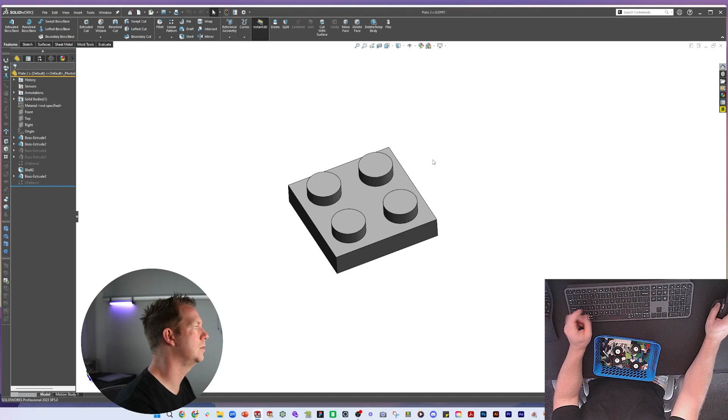In our first lesson on this subject, we built this little plate, 2x2, with configurations going up to 2x8, 2x8 being the largest one needed for this assembly. There's a bit more work to do on this part, which we'll add in later.

We'll come back to some detailing at different points throughout the process. How we're going to run from here is we're going to build the parts in order that they come up in the assembly instructions. So our 2x2 brick is number 1, but we now have a 2x1 and another piece here, which we will find out in a second what they are.

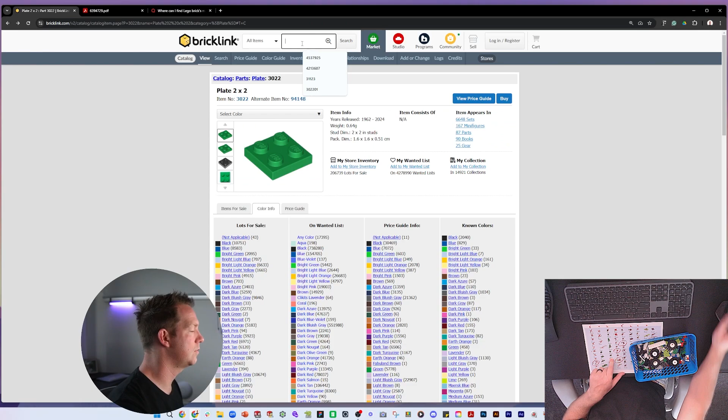So that green brick is going to be called - we can search for it here. Go to 3023, it is a plate 1x2. Now, I think the smartest thing to do will be to use our plate 2x2 and add one of these configurations, which will be 2x1. We're going to add this one in manually because it's going to act a bit different to the rest of them, since in the 2x1 we're going to come up here before the shell.

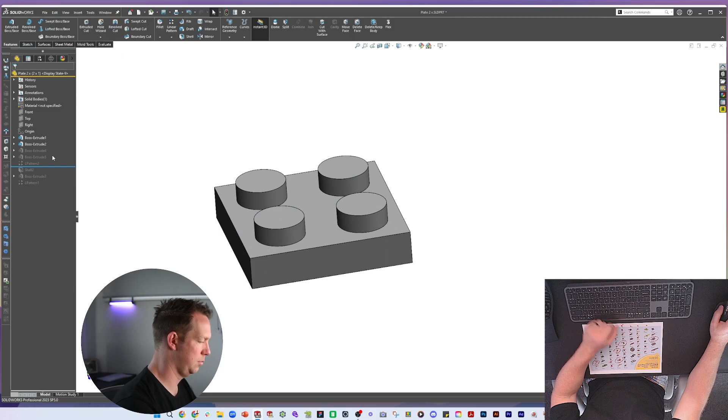Now let's just have a look at the part itself. You can see it doesn't have a big circle in the middle, just got the little circle. So the detail's a little bit different. The top's the same, and we'll put some measurements in to see exactly how big that is. So we will change that detail.

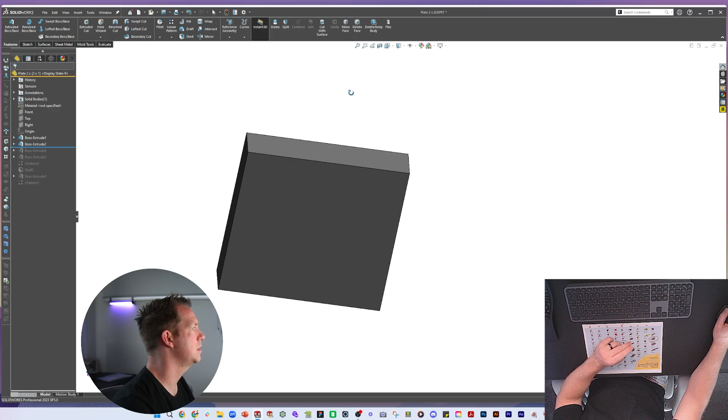And we're going to do it here. The way we'll do it is to come up to this point and we'll use our right plane, and let's see if we can't cut a side off and see if those parts will be central. Now, I get the feeling they won't be.

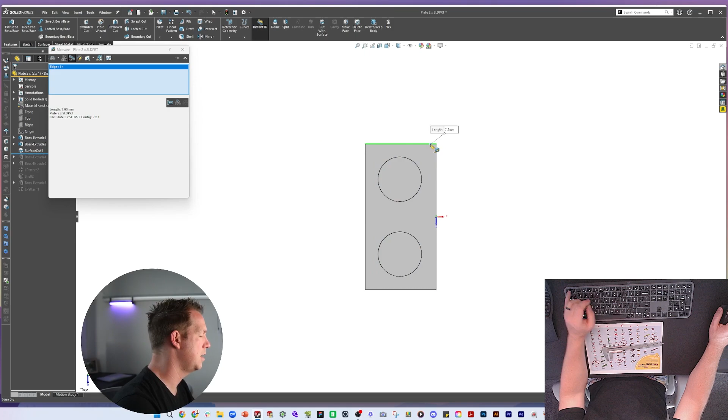First, let's measure. Now, we have here should be 15.8, which it is. And then the skinny side looks like 7.8. If we click on that edge, 7.9. Now, what I'm interested in seeing is how close those are to the center point here, and I can see that it is 0.11 of a millimeter off being the center.

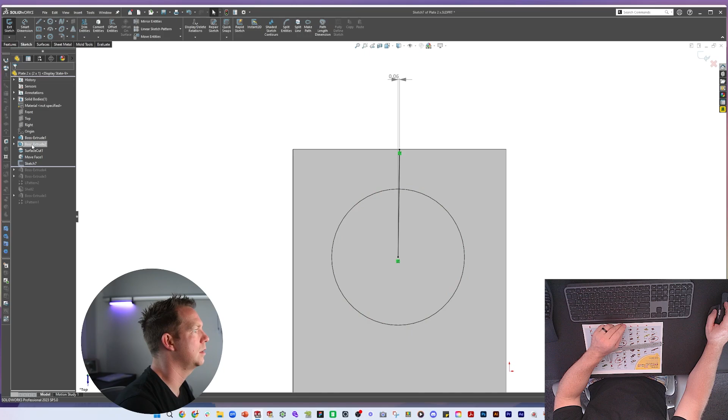So what I'm going to suggest we do is an offset face, 0.11. We're going to move this face inwards. Now we should find that this line is vertical. Let's see what's going on there - 0.06, okay sorry, to 0.2 we have to move it. 0.22. And now that line is 0, 0.

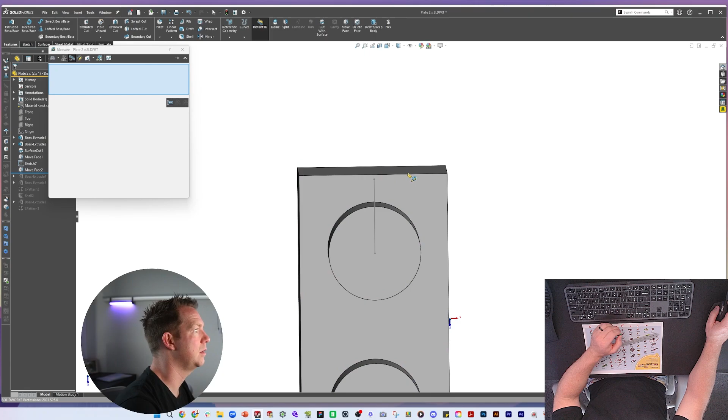And now our measurement is 7.7, 7.68. In fact, I think it's a tiny bit small. So what we're going to do now is just move both sides out 0.06. Okay, so now it is in the middle, and we have a 7.8 millimeter dimension, and it is only for this configuration. So that's cool.

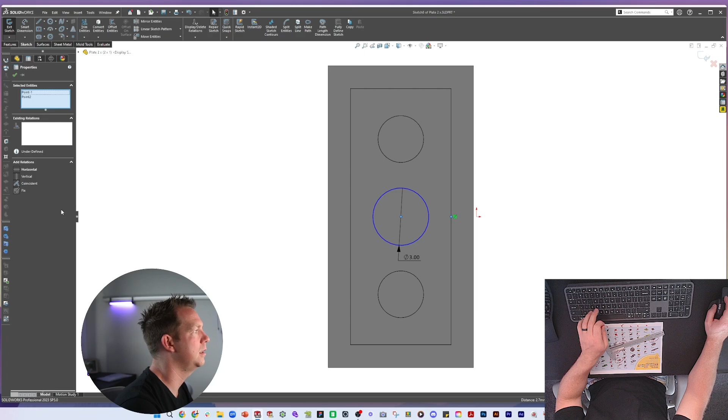Now, if we roll down, we get the shell. Perfect. And then this extrude, we're going to suppress that one, and we'll do a new one on the bottom and draw a circle. So we can measure this one, basically 3 millimeters. We can use the midpoint of this line to line it up horizontally, and the midpoint of this edge to line it up vertically.

And if we just look at this sketch here, there was a 0.8 mil offset for the inside, so we'll do the same here. Offset 0.8, reverse direction. Okay. And then extrude up to this surface. Yep, yes, like that. So let's check that it's worked.

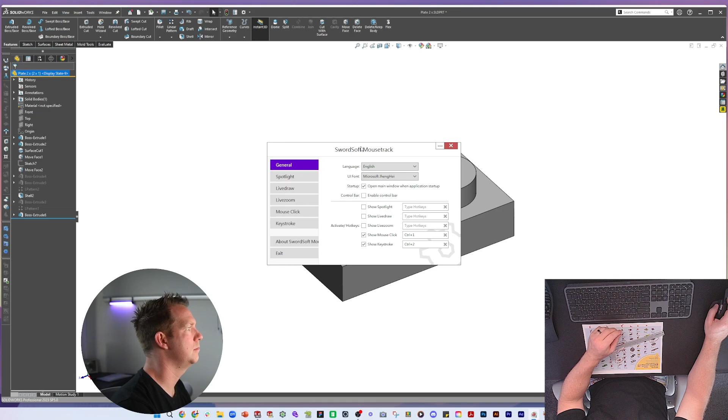Firstly, let's save. Second, let's go back to our default configuration. Check that there's no problems. Fine. All our other configurations - fine. And then our 2x1 - yeah, fantastic. It's amazing how quick it can be to do these parts. Very happy with that. Next one.

Our instruction list is item number 6310268. There's a plate modified 1x2 with 2 open O-clips. Let's find one and then let's build it.

First off, we can see that this part is very similar to this one. You're basically using the same starting point, and then it's 2 C-clips on the ends, which are going to be a different detail. So we found the name of that: it is a plate modified with 2 open O-clips, horizontal grip.

I'm going to select this name, then go into this file and save as a copy and open. I'll paste the new name: plate modified 1x2 with 2 open O-clips horizontal. Just going to add a dash in there. Now I'm going to save.

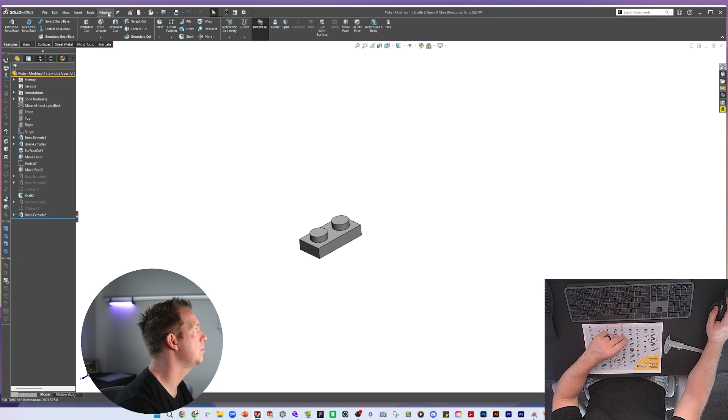When I do save as copy and open, it opens a new file which is the copy of the original. If I go to my window with Control Tab, you can see I've got the original here, and a new file over on the left, which is the one I've got open right here. So first step, we could delete all these configurations and clear things up.

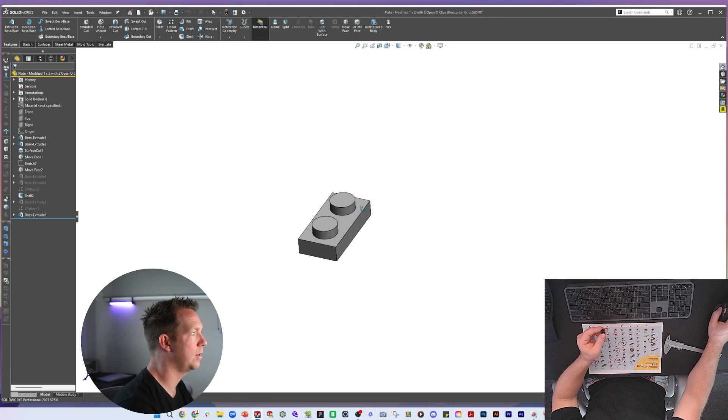But if we ever come across another Lego piece that's instead of 2x1, it's 2x2 or 2x3, and it's got these same open O-clips, it'll be extra work to add it back in. So in this example, I'm going to suggest we just leave it there as is, so it's not causing any harm. It's not a lot of data, and we just keep building on this file in this configuration as it is right now.

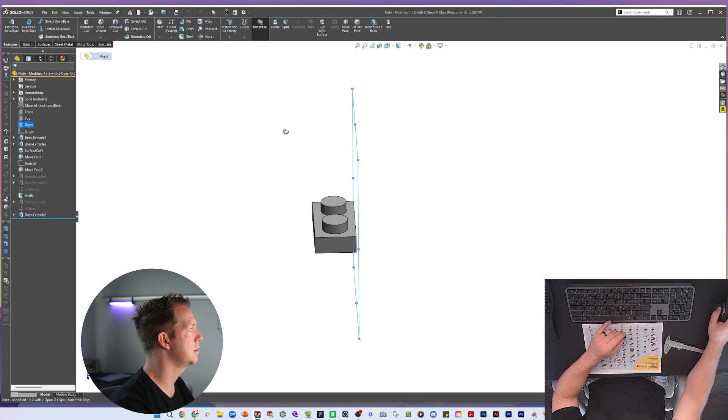The only thing I will note is where this plane is, the right plane, because when we do have those other configurations, they go out that direction. So I think it'll be wise to build the clips on this side, because this face will not change.

So first we'll just do a dimension check, just to see if it's the same as everything else. So 15.8, yep, and then 7.8, yep.

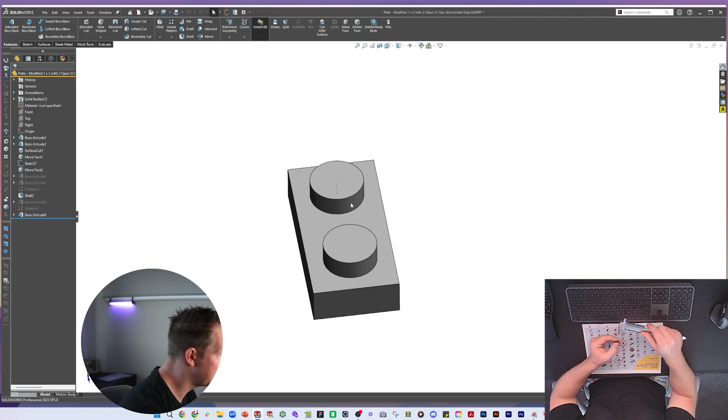Cool, so now we've got to do this little C-clip detail. This face here on the bottom, you see it's flat, okay? So it comes flat from that face, and then we have the C shape that goes below that and above the top edge. So we're going to draw that in.

Have a cut across this face, we have a circle in the middle, all right? In this example, I think what we'll do is sketch it and add some dimensions as we go a bit later. So start with the big circle.

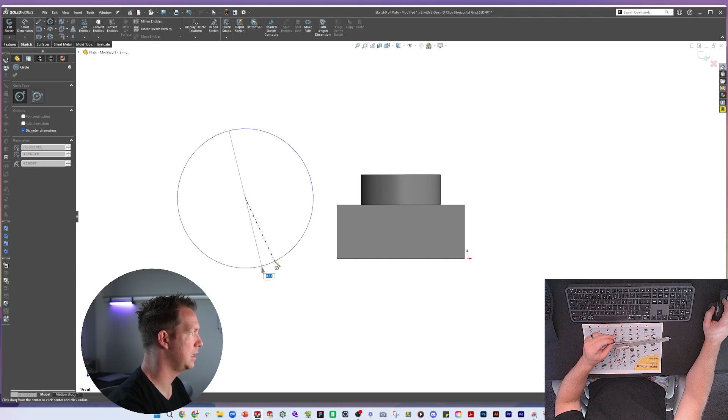I'm going to do also a little circle, and a straight line. I'm going to use my trim tool to trim that away. It's not right at all, but that's okay.

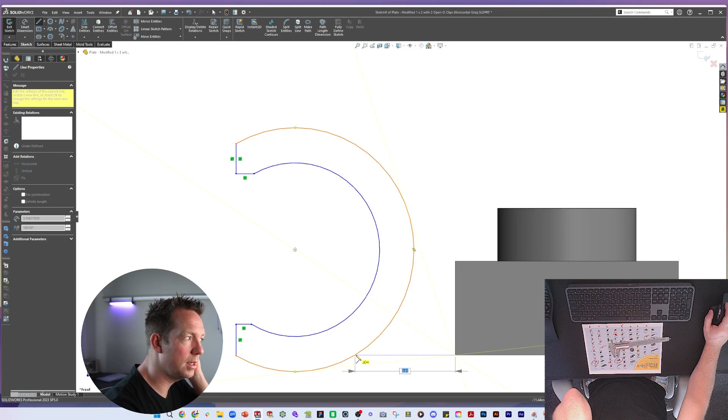I think we'll find there's a straight edge here and here. So obviously the straight edge at the bottom joining onto this. So you can see when I'm sketching, I'm trying to purposely get the horizontal relation added - just saves me time. There's also a horizontal relation here.

There is a fillet. So if we have a look here, you can see that there's a curve in the shape. But this one thing that I do want to note is that the 3D model here is not as accurate as what we're going for.

And what I can see in this, I'll try and get a little macro shot for you. There's a little flat edge that comes across the top before the fillet. Apologies for how small it is, but I don't think the fillet joins straight away - I think it's flat, and you can kind of see that this angle with the light is the same.

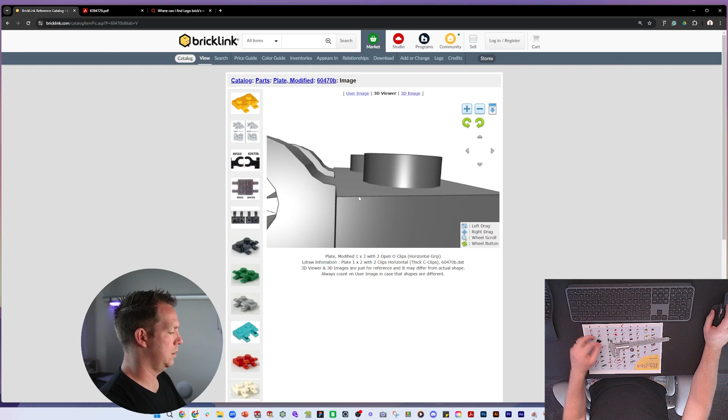So we're going to draw that a little bit different now. We've got it here, and we'll put a radius in afterwards. So let's trim that. Okay, this looks good.

Now first, the faces on that C, I can see they're not flat as I've drawn them here. They actually angle in. So I'm going to have to change this and just give it a very slight angle.

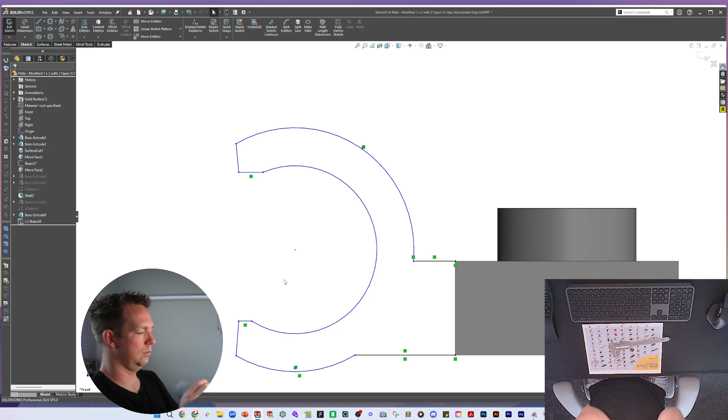All right, we'll clean that up later. We will say that the outer points are vertical, so these two, which means they're in line. And this is one that we can measure. So I can measure from that outside to that point there, and I can get an accurate measurement. In this case, I'm getting 13.5.

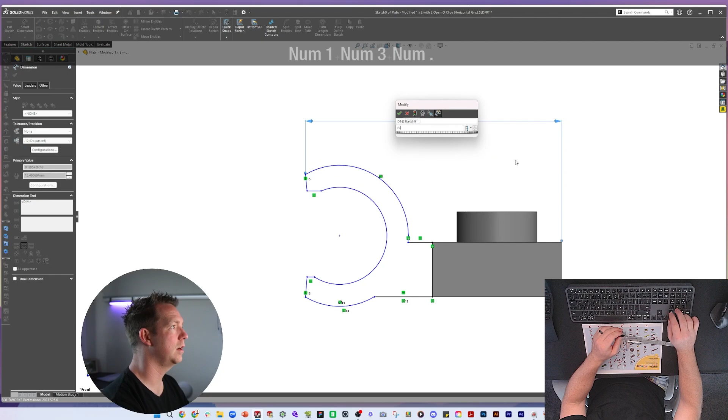Now, I'm not so surprised about the change in shape there, so I'm just going to bring it back. I want to change this dimension later, but not yet. I'm just going to type in a little note as a reminder for me that I need to change it to that dimension. I just don't want to lose the shape I've got as I'm sketching it right now, until I've got a few more dimensions on.

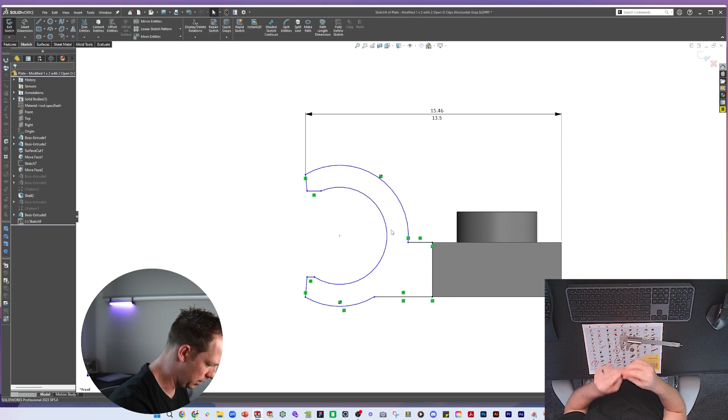Okay, the overall diameter of this circle, easy, 6. Now when I click here, it's going to give me a radius. I can type 3, but I can click on that Leaders button, and I can change it from a radius to a diameter. Can do a little trick there for you.

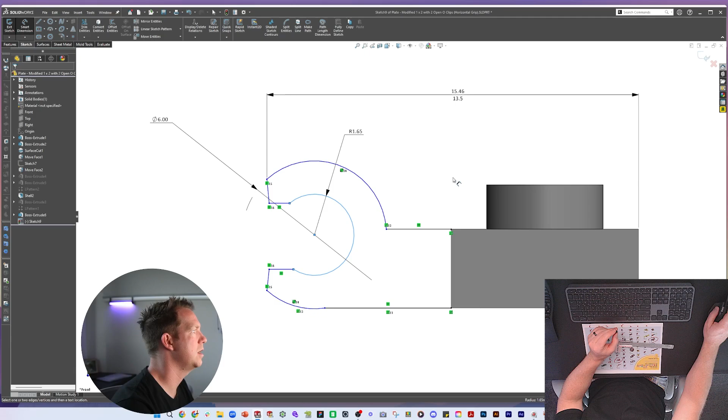Okay, so let's clean up this side. These two sections are vertical as well. The hole on the inside, that's close enough to 3, so it might be like 2.9. So 1.5, but again, let's just change that to a diameter, right?

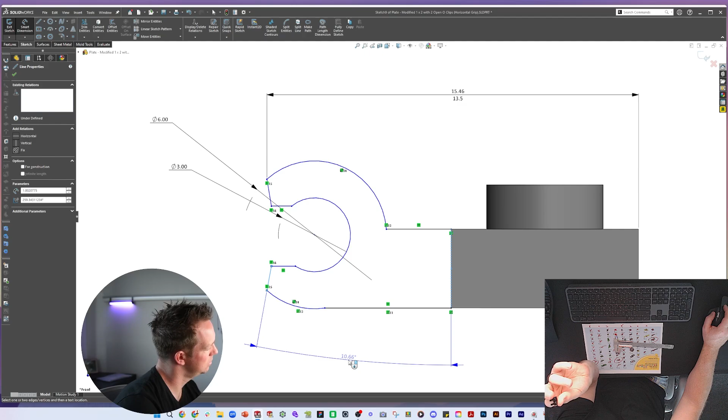Now, some things are going to be very difficult to actually measure, given how small they are, like the angle that this face goes in on those two parts. So what I'm going to do instead is guess based on my eye and experience, and I'm going to say they're 10 degrees from there. And what else could we dimension now?

Well, let's see if we can fix this dimension now, 13.5. Okay, that's much better. Let's bring this around here.

Let's also make a little flat edge. The little flat edge I'm talking about is this face here. Now in this model, it's angled out, but when I look closely at this, they look nearly vertical to me. In reality, maybe they are out, maybe one is even down. Measuring this kind of detail is nearly impossible. It would be a toolmaker discussion, designer discussion. I'm sure they've done lots of engineering on it. We're going to keep them flat, so that's fine from my point of view. Just going to make those vertical.

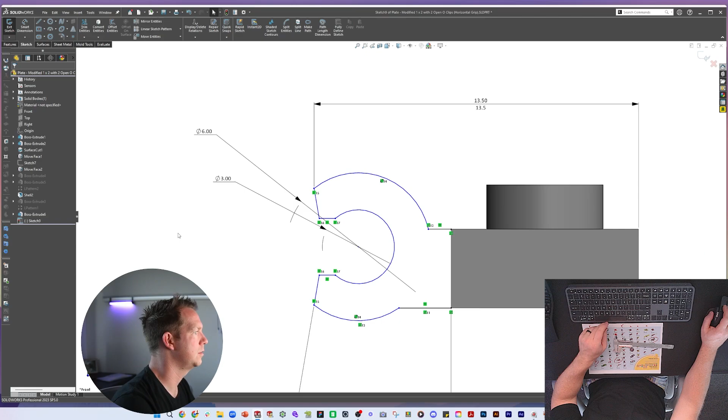What I can do though, I can measure the opening. So this is different from measuring the diameter. I'm measuring the opening between those two points. So while the diameter itself is, I'm getting about 3, the opening is not that much smaller, about 2.9. So that's between these two here.

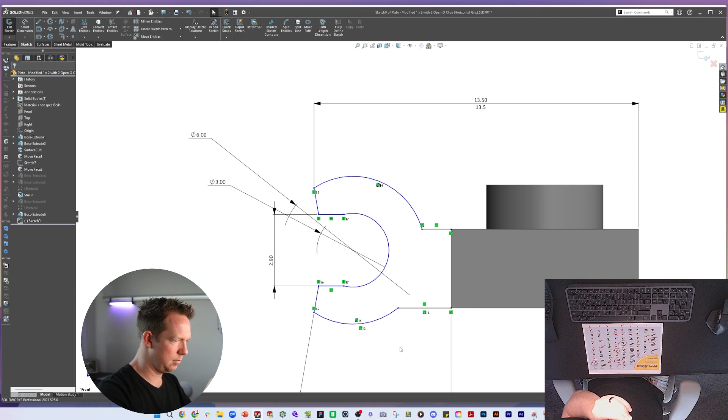Okay, starting to take shape. I can measure again, we're trying to fully define this sketch, right? So I can measure from the opening to the back face, which is about 10.4. Go from this edge, hold shift, as here, 10.4.

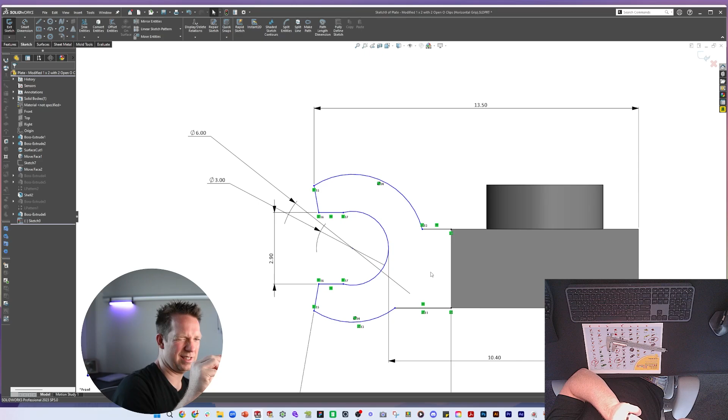In this case, it's kind of a height, all right? So we know that the grip goes lower than the base. So how much lower? Is there a way that we can measure this? Yes, I think, but not with these calipers. We could try and measure from the top face, kind of flat, but it's so small, it's going to be hard to get accurate.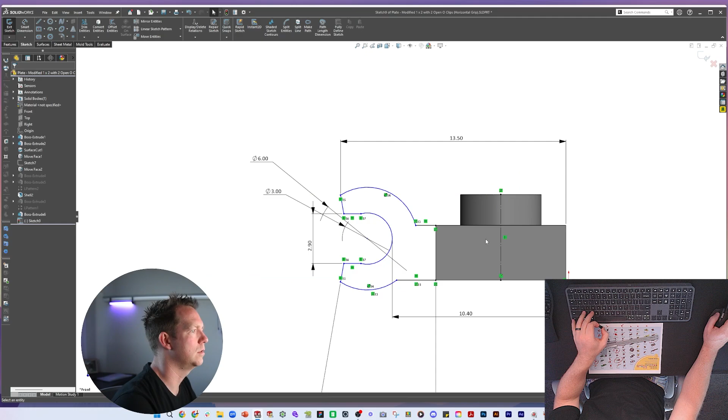So I'm going to put a guess in, and I'm going to guess that it's actually this full height that controls the center point, like this. That looks pretty good to me. And I'm going to close up the sketch with a line here.

And now I can do that fillet as well. So again, I was saying that there is a fillet between these. It's obviously less than 1.18, I'm going to put in 1. And is there a fillet on the bottom as well? Say yes.

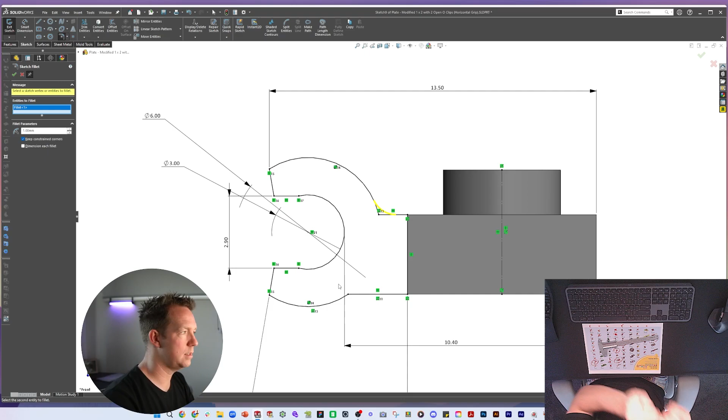I'm going to put the same one in there for consistency. All right, and then we have a fully defined face. Now the remaining detail - so where there's these 2 clips, what's this button do?

Oh, that's better. Gives you an image. Cool. All right, so we can extrude the width. We can do it on one side and then mirror it. Or we can do both sides and then do a cut in between.

Did I cut these? Normally I prefer the mirror. Then it's all mostly controlled in one feature, right? So we can control the whole width of this in the first feature, and then the second one's just duplicating it. Whereas if we do a full extrude for both, and then we do a cut for both, that's 2 features that control the geometry.

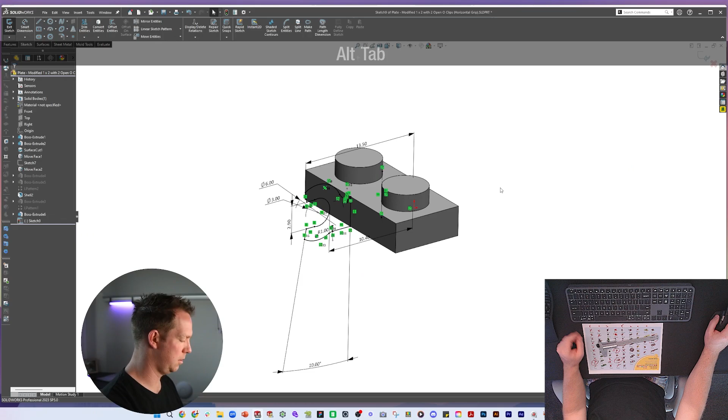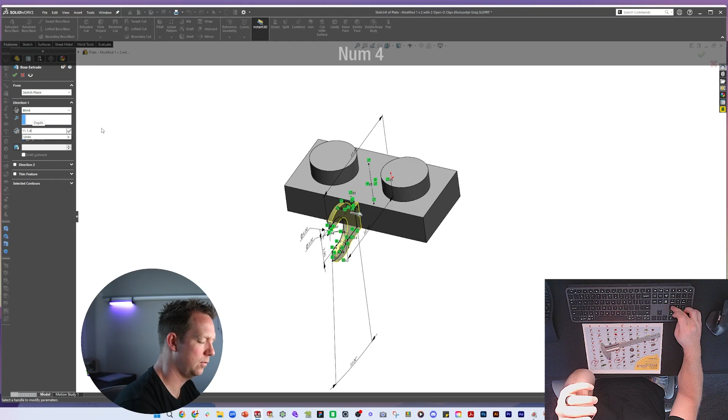Make sense? So here we can measure the width. It's going to be 11.1. So we can go to extrude, and we're going to do the maths. Okay, so it's going out to 11.1. The gap in between them is 4.8. So 11.1 minus 4.8 divided by 2 equals 3.15.

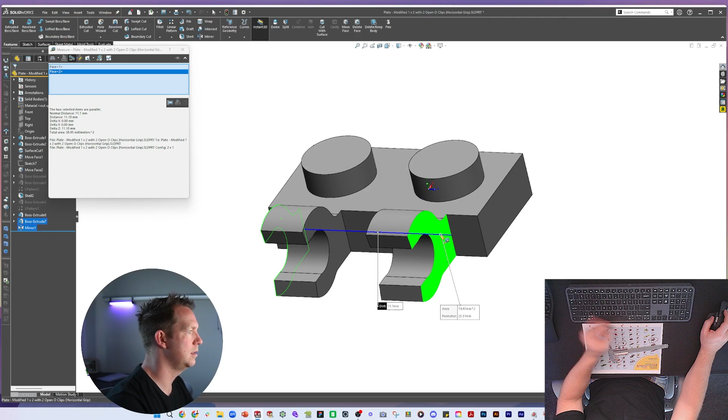We can also measure this. Yep, and so it's going to be that distance out, offset, 4.8 divided by 2. And then if we mirror that around the front plane - remember our front plane is going right through the center - we get a mirror feature, this one. And if we now measure it, we should be getting, I said 11.1 and 4.8. And that's all controlled in this feature here, okay, with these measurements. So if we need to make any changes later, we just change that one feature.

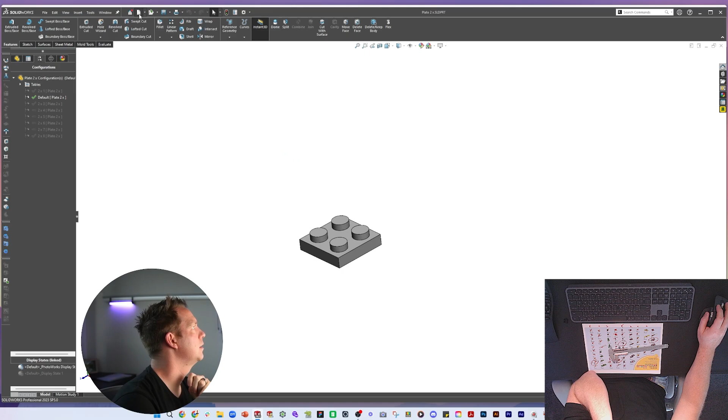Okay, fantastic. We now have enough parts done to start our assembly. We're going to start with that one there. So I'm going to go back to this. I'm going to go to the default version. I'm going to click New Assembly. I'm going to import that 2x2 piece.

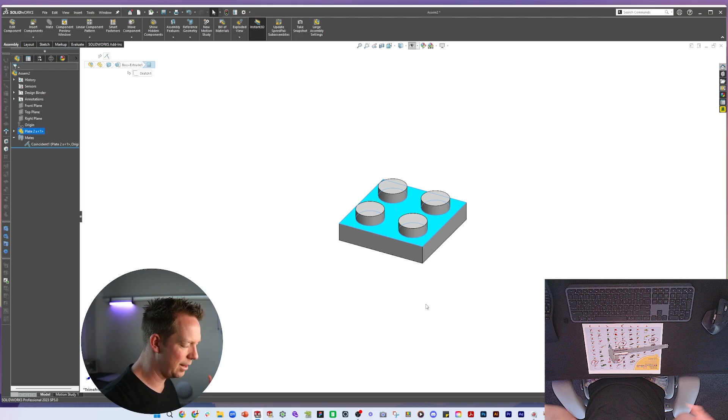I'm going to float it and use my origin to fully define it. Now that means that later we can delete this mate and we can reorient everything based around this part. Probably later it'll be based around other parts that we've added - might be the wheels, might be the main body - but for now everything's going to be referencing this part from here on. And now we're going to insert some components.

Now I'm making a copy of this part here, so I can just click Control on my keyboard, click the part and make a copy. And then to change the configuration, I click on the drop down, and there we go. For the other part, a modified one, I'll bring it in like this.

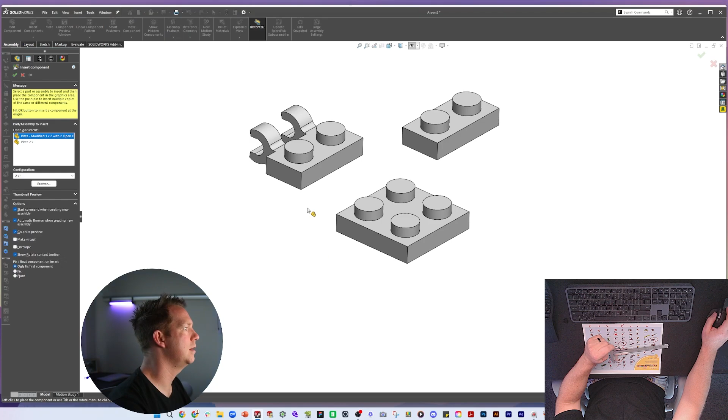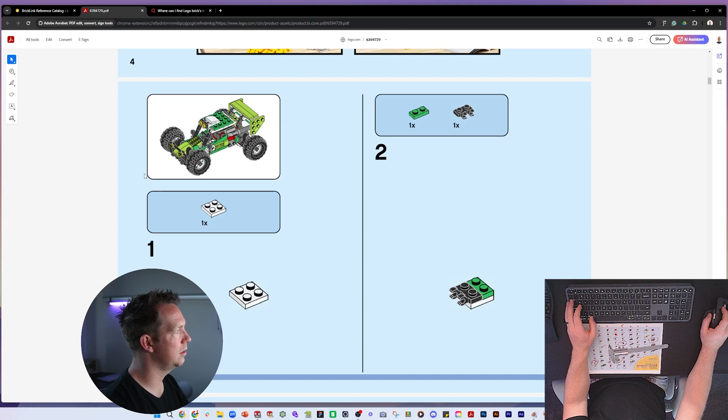Now in our assembly, one main thing we want to do is just get our orientation right. We're going to make - let's look at the front. So this will be the front of the buggy, the front being where the lights are going. So we're having the right plane going through the middle, and that's why I've turned it on here. This is always going to help us with our orientation.

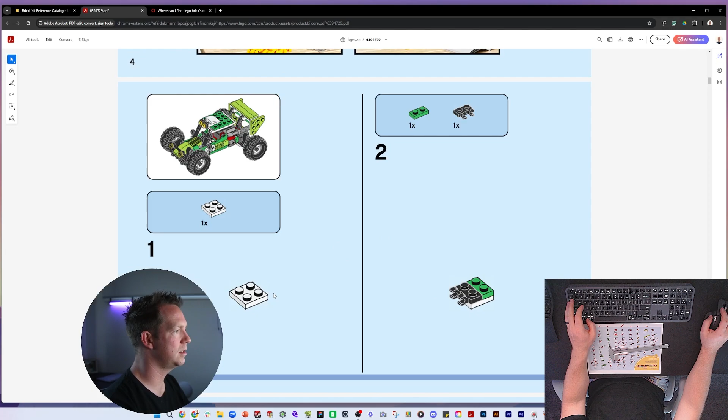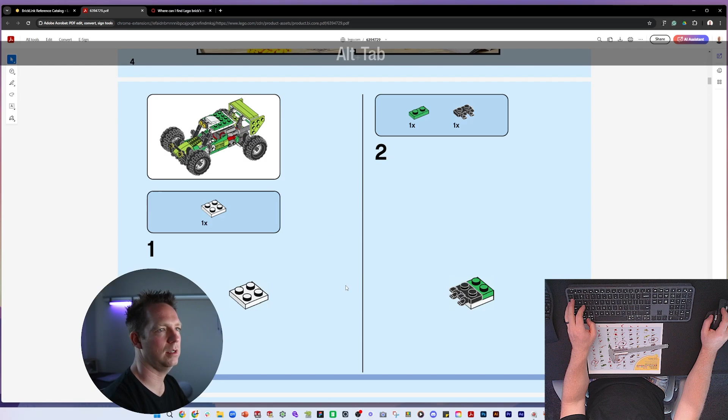So in the Lego images that we see here, it's not an isometric view, maybe dimetric. If I do the same thing here, maybe trimetric, isometric. Okay, we're going to correlate this view to what we see in the instructions, unless they tilt them around. So let's put those parts in.

Now we're going to start with basic mates and make things all - just going to keep it simple. I'm just adding standard coincident mates. It's okay, and we'll see how things are lining up. They're looking pretty good. Cool.

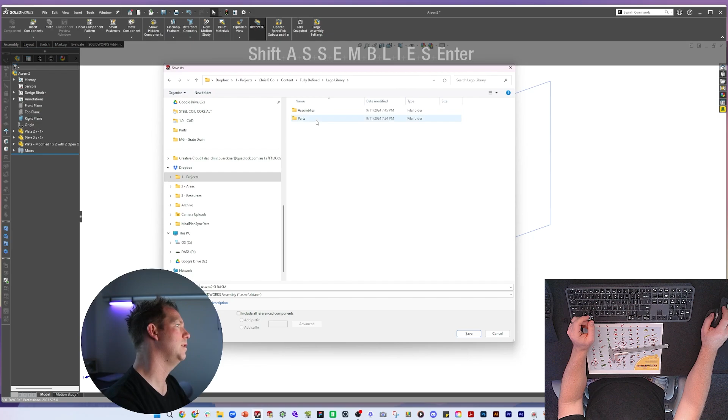Let's save. Now, Lego library assemblies. And this one is the 31123 off-road buggy - pretty sure that's what they call that. Yep, so that's how we're going to name it. 31123 off-road buggy. We can always change things later.